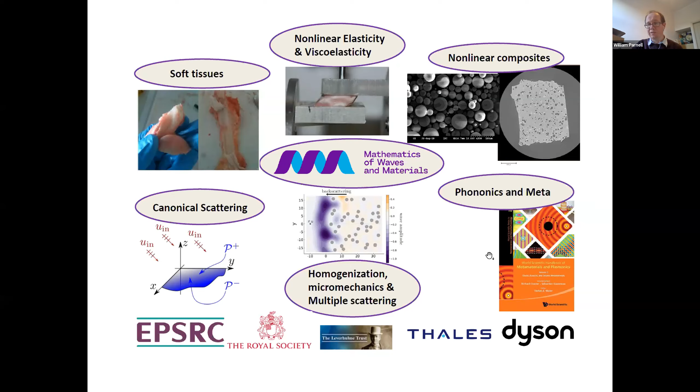So this is a broad overview of the research we do. Obviously syntactic foams is a key part of that, but we do lots of other types of research associated with soft biological materials, particularly those under large deformation. We work on fundamental scattering associated with wave propagation and diffraction from edges and corners. We do models from homogenization and multiple scattering in order to understand propagation in very complex microstructured media, including syntactic foams, of course. And we also think about new metamaterials associated usually with acoustics and elastodynamics.

It was the good old days where people could actually get together and talk about science in person. But it's fantastic that we've got this opportunity to do this virtually. And strangely, I think it's quite useful to be able to do this virtually. It connects more people than we could do, for example, at the small workshop in Manchester.

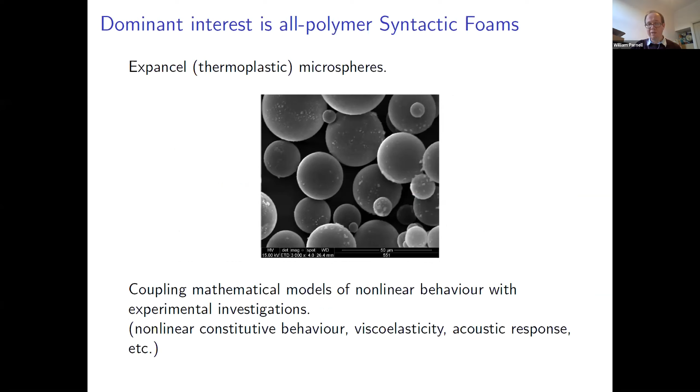So our main interest in terms of syntactic foams is all polymer syntactic foams. When microspheres are these Expancel thermoplastic microspheres, we try to couple mathematical models of nonlinear behavior with experiments, and we're critically interested in nonlinear constitutive behavior, viscoelastic response, and the acoustic response. We're interested in being able to model this kind of complex nonlinear behavior that arises in these syntactic foams, usually associated with the complex buckling and interaction of the microspheres within the composite material.

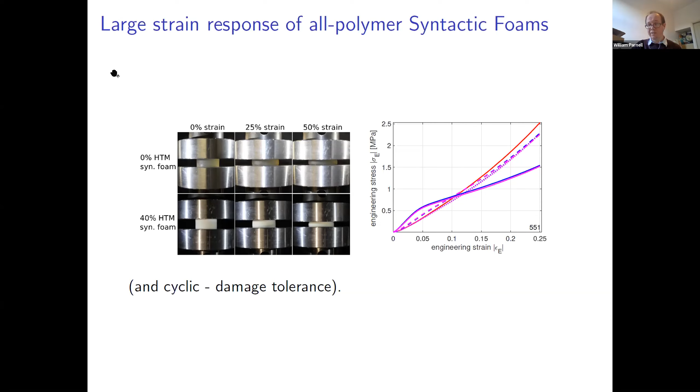So with added filler, you obviously get this increased stiffness initially, but also this softness at large strains. These materials are, however, very, very good in terms of their recoverability. That's a key advantage of them over things like glass microspheres.

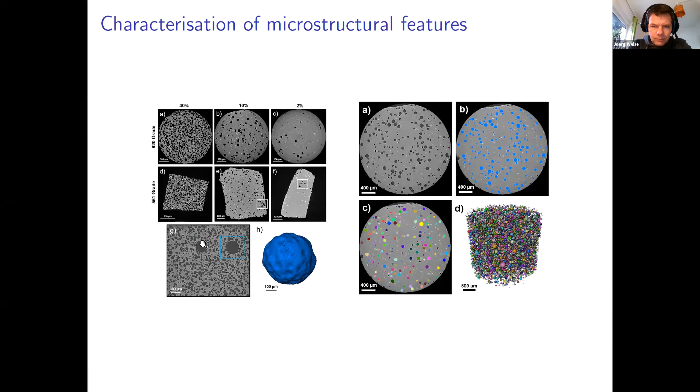We've done quite a lot recently in terms of materials characterization. We've got very good X-ray computed tomography machines at Manchester, and we're able to do things like characterize microstructure, radius distribution, etc., and also imperfections and defects within these kinds of materials. Finally, recently, we've done quite a lot in terms of nanoscale resolution and characterization, mainly to try to understand shell thickness distribution and a bit more information about these kinds of Expancel microspheres.

And we've tried to couple those to models, not for the prediction of the mechanical properties of the medium, but more in terms of the prediction of the shell properties themselves.

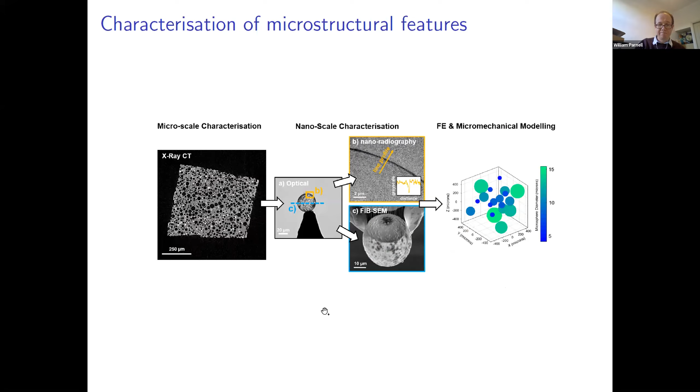Thank you very much. Jörg, do you want to go next?

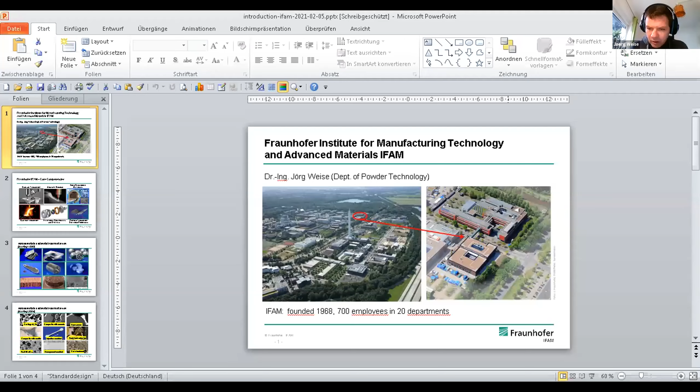At the moment, I'm not allowed to show slides. Oh, okay, let me check again. Yeah. You have the co-host permissions to share slide. No. Okay. Yeah. You see it? Yes. Okay. Yeah. Thank you.

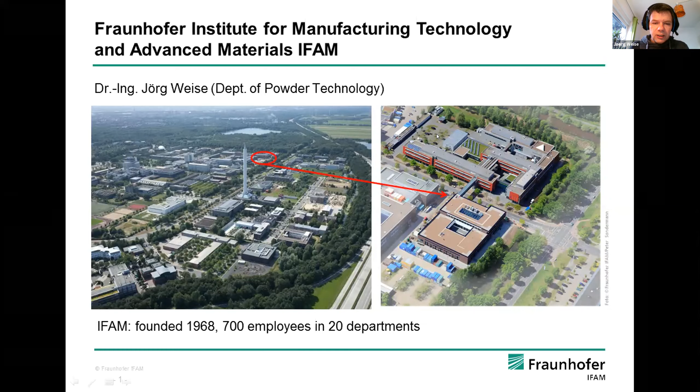So my name is Joerg Weise. I'm working in the Department of Powder Technology at the Fraunhofer Institute IFAM here in Bremen. You see the university campus in this picture and the building on the right. The institute is more than 50 years old. We have now more than 700 employees working in 20 departments.

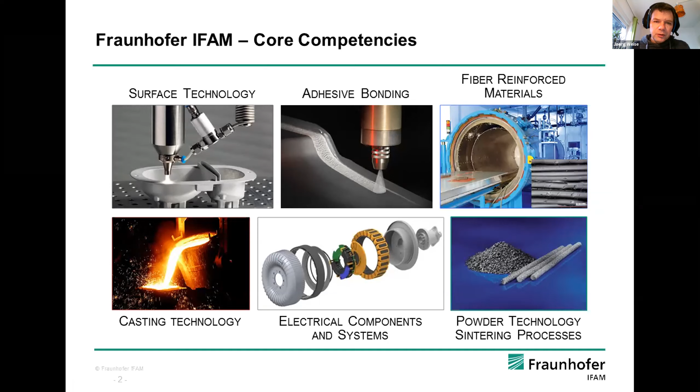We work more application related, I have to say, in comparison to universities. This is a Fraunhofer model. So we are not working that much in fundamental research. We are situated somewhere between industry and fundamental research.

In relation to porous metals and metal foams, our activities started more than 30 years ago, with the development of Foaminal, one of the metal foams which was really, or which is really applied in the industry. You can see on the top left. And the second variant of this foam type is the aluminum foam sandwich. This is also produced in serial production. And the third variant of this aluminum foam is the so-called APM spheres.

You can see there. This is still not in production, but we have a lot of interesting projects with the industry. Porous materials not only produced by classical foaming, but also by other techniques like, for instance, additive manufacturing, or like casting. In the middle, you see one example of an open porous aluminum foam, which was produced by means of infiltration of placeholder structures with aluminum melts.

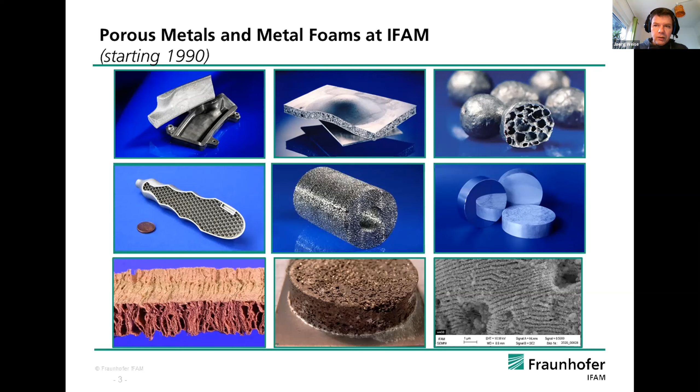Coming to the syntactic foams, we started a bit later in 2004. I was still in the casting department, so we started with casting production of syntactic foams with aluminum and zinc. We also tried to combine it, or we combined it with other kinds of foams. In the middle top, you see one example of a syntactic foam combined with a ceramic foam.

Syntactic foams are mostly known to be closed porous, but with some special treatments, you can open the structure. You can see on the right side on top: two sintered spheres, or the sintering neck of two hollow spheres. The hollow sphere structure was later infiltrated with metal, and the sintering neck was then opened using a high pressure treatment with water.

We combined such open porous structures also with active materials, like zeolites. Coming to the sintered structures, we later changed to combine the hollow spheres also with steel, iron, or other sinterable metals. So one focus in our department is metal powder injection molding.

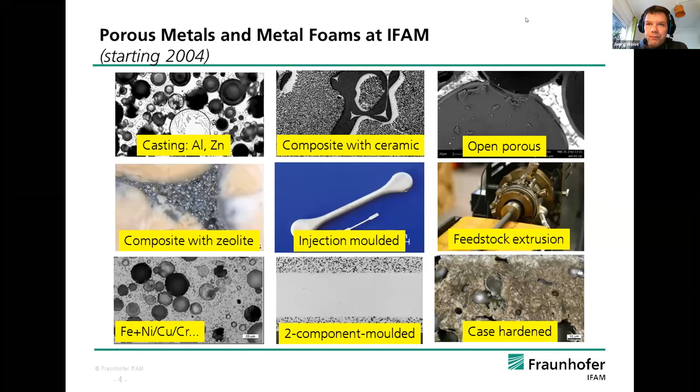Using injection molding, you can also nicely combine the foam with compact material. As we see from our activities with foams, it's all the time used in combination with compact material, so here you can do this in one process. One of the more recent activities was adapting the properties by means of hardening of steel syntactic steel foam. Okay, that's all I wanted to show. Thank you very much.

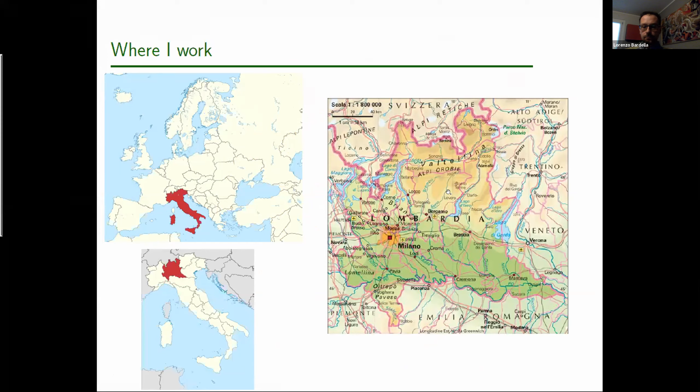I work in Italy, which is a country facing the Mediterranean Sea, South Europe, and Brescia is in Lombardy, a north region of Italy. Here you see the region - we are 90 kilometers east of Milano, close to the Alps and between two nice lakes. Here you see a partial view of the engineering campus, here the entrance of the department where I work in Brescia, and here one of the main squares in the city center.

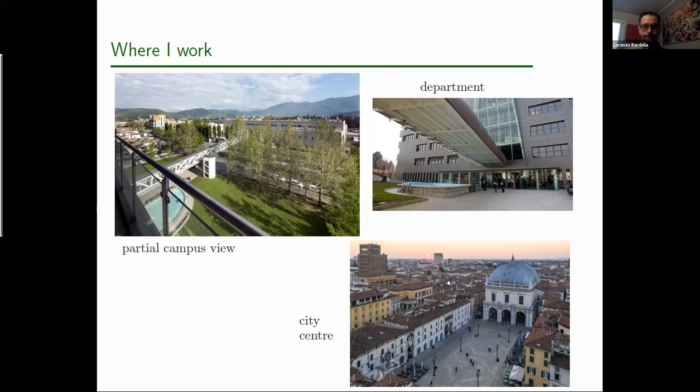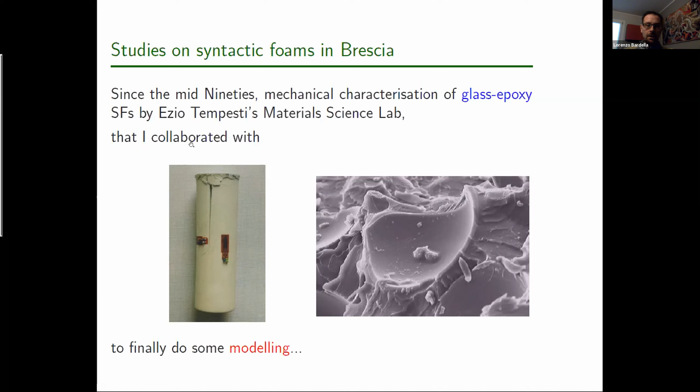However, my task was to do some modeling. So here in Brescia we have developed micromechanical models, from which we want to understand something of the composite behavior, starting from the knowledge of the behavior of the single phases - so matrix and balloons in the case of syntactic foams.

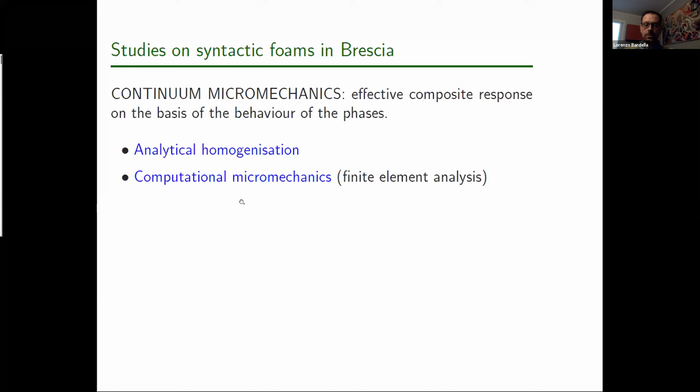So we developed analytical homogenization, and within this micromechanics framework, we developed analytical homogenization and finite element models of the syntactic foam microstructures, from which we want to understand something of the behavior of these materials.

About analytical homogenization, we started by developing linear elastic homogenization procedures to have accurate estimates of the effective elastic moduli. Then we got a grant from Intermarine, a big Italian company - it's a shipyard, a big shipyard company in Italy. So we developed an analytical procedure to optimize the mechanical response of sandwich panels, of glass epoxy sandwich panels whose core is in syntactic foam.

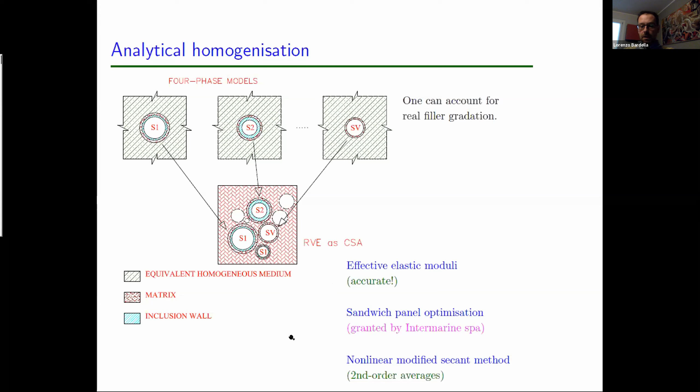And finally, we extended the linear elastic homogenization procedure to the nonlinear range in a so-called modified secant method.

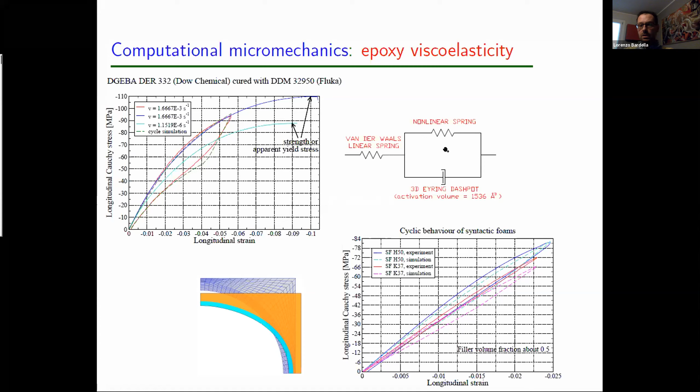About computational micromechanics, that is finite element models, we started by studying the effect of the nonlinear viscoelasticity of the epoxy matrix on the overall behavior. For this purpose, we used a simple unit cell model, and we studied the cyclic behavior of various foams by using this constitutive law for the epoxy resins.

And then we developed a sort of nonlinear Eshelby-like model, which was used to provide an explanation for the brittle fracture of a specific syntactic foam under uniaxial compression.

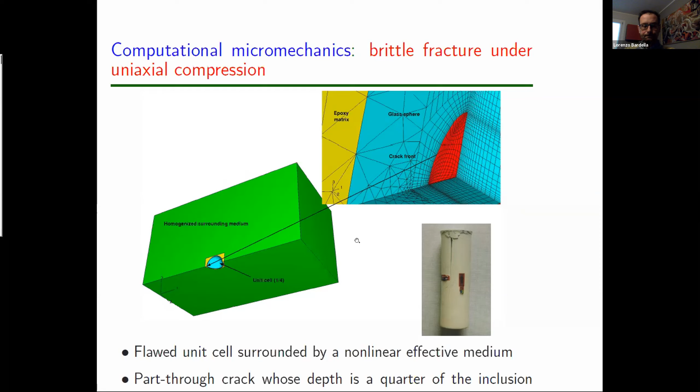Later, we started working with NYU, with Nikhil Gupta, Maurizio Porfiri, and their students, and we started developing multi-particle unit cells. First, we used these multi-particle unit cells to critically assess the linear elastic homogenization procedures we developed. Then we used these models to understand something of the brittle failure under compression by plugging into these models a novel criterion for the failure of the microballoons.

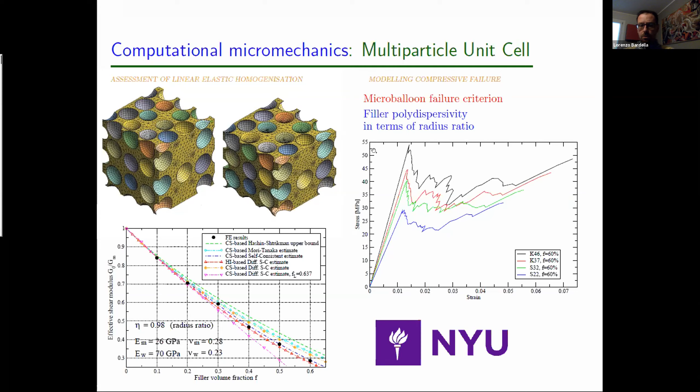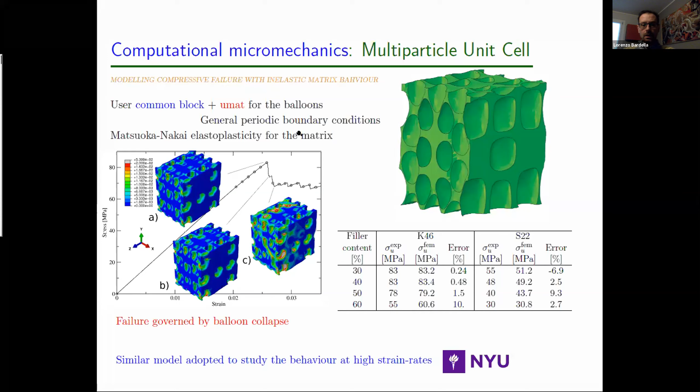Its purpose was understanding the different failure modalities of syntactic foams under hydrostatic pressure, and different failure modalities depending on whether the samples are painted or not. Let me remark that this model is quite interesting because here the filler volume fraction is 69%, which is quite a large amount for a computational model. I think that's it. Thank you.

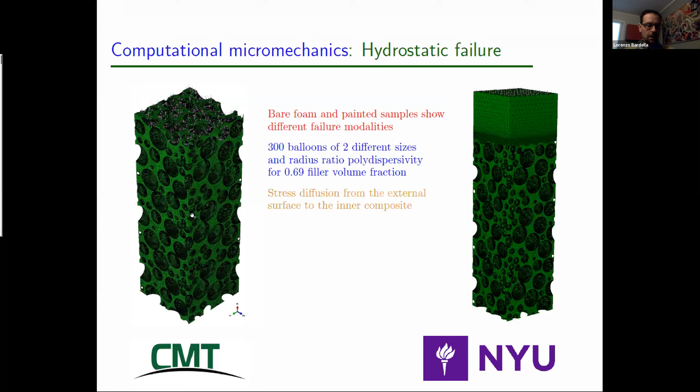Thank you very much. So that was a good introduction from everybody. I'll start with the first question - we are representing different parts of Europe: Italy, Germany, and England. So who's funding the syntactic foam research in these countries? Is it industry? Is it government organizations? And what is the mechanism? How has the support been so far?

Yeah, okay, if I may start. The syntactic foams is a very interesting field for me, but in respect of funding, it's not the best field, I have to say. Especially at the moment - we had a little bit of funding from government a few years ago, but at the moment it's really difficult to get funding for such a lightweight subject. So you have to combine it with some terms like digital, additive, artificial intelligence, and so on. Otherwise, you have no chance to get any funding.